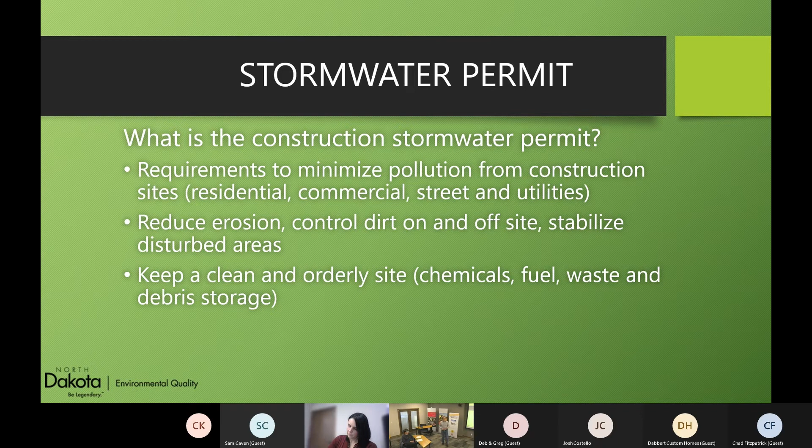Pretty much the permit is written to reduce erosion from a site. If there is any dirt, just to control that and keep it on site. If it does get off site, bring it back on site, and then just stabilize the area once the work is done. It also is essentially just keeping a clean and orderly site, so how do you manage your chemicals, your fuels, any of those type of things.

So the permit exists because it comes down from the Clean Water Act. The Clean Water Act, essentially this was back in the 70s, established a permitting process for what was considered a point source of pollution. Construction activity was eventually defined as a point source of pollution. It's one of those where, if it does rain and it starts washing material off the site, you could point to a construction site and say that is where the source of pollution is coming from. Does not include agricultural land. Agricultural land is exempt, that is considered a non-point source of pollution, and so therefore a permit is not required for them.

So the way it comes down then is in the federal rules, it says here is what we expect from a construction site. And then through that, EPA develops their permitting process and their permit that is used kind of as the national guidance for how others, or states, should develop their permits. And then in the state rules, we basically say we will incorporate the federal rules as written, not necessarily EPA's permit, but we incorporate the federal rules. And then we would look at EPA's permit and say, okay, here's basically the template, what is applicable to our state, what is not applicable to our state.

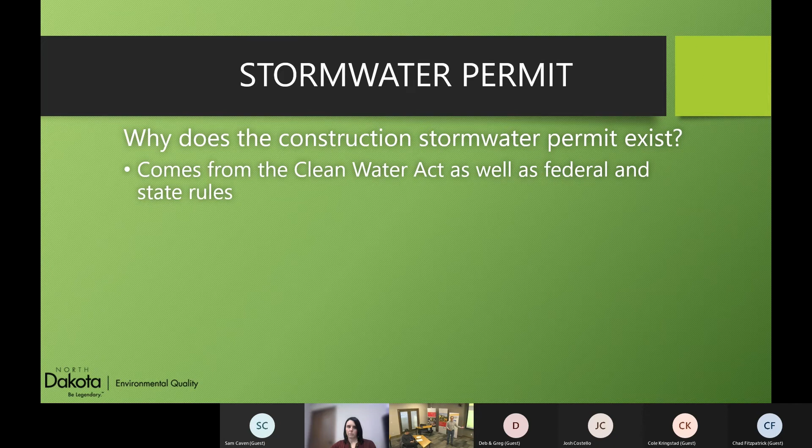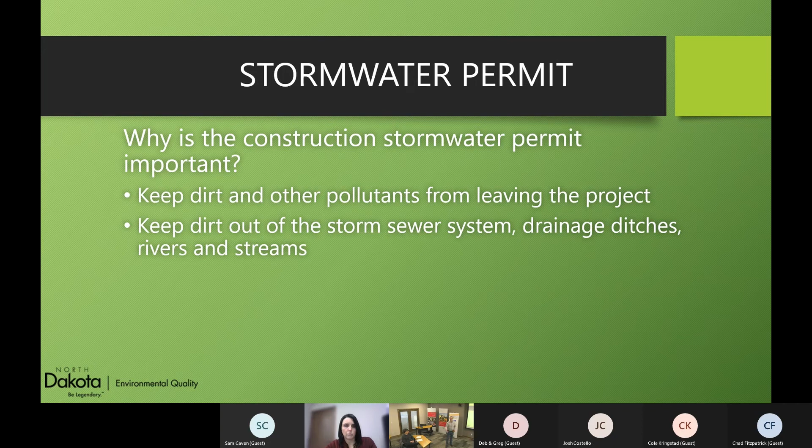Why is the permit important? Basically, keeping dirt and other pollutants from leaving the project. This is just to minimize pollution from your activity, keeping the dirt out of the storm sewer systems, drainage ditches, rivers and streams. Rivers and streams are important, but as far as infrastructure and flooding issues, you'll look at it as keeping that storm sewer system clean, keeping those drainage ditches clean.

I'll do a lot of talking on the North Dakota side, basically because that's what I am familiar with. There is obviously work on the other side of the river in Minnesota, so just keep in mind that that is a different agency, a different permit that you would operate under versus the state of North Dakota's permit.

There is involvement of the U.S. Environmental Protection Agency, but those are two different regions. The Red River basically splits - we're in Region 8 in North Dakota, based out of Denver, and I believe it's Region 5 on the Minnesota side, out of Chicago. So two different EPA regions.

But I'll talk about the North Dakota side, the North Dakota stormwater permit. There's also local jurisdictions involved with some of the activity you do. In urbanized areas, we have permits for, say, the city of West Fargo, city of Fargo, city of Horace - they have a permit with the Department of Environmental Quality, called their MS4 permit. Part of that MS4 permit says they have to develop an erosion and sediment control program for construction activities. So you start with the state involvement, and then you also have the local involvement, because they have a permit with the DEQ to say they're going to have that program. Again, that is just in the urbanized areas.

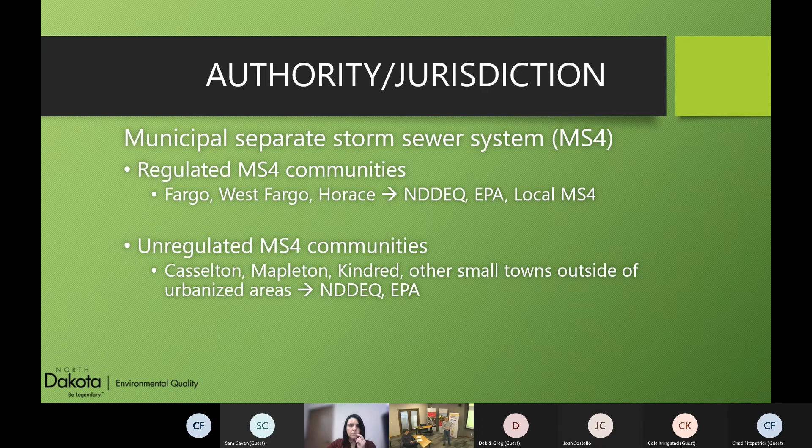Penalties - just going to touch on these. Under our state rules, we have the ability to issue a penalty up to $12,500 per violation per day. That's in our Century Code 61-28. Again, that's up to that $12,500. So when you talk about what goes into calculating a penalty, we don't have a flat fee for, say, not having a stormwater pollution prevention plan, for tracking mud out, for not having a silt fence or not doing maintenance on a silt fence.

Our fee is basically calculated based on severity of the violation and the damage of the violation. How significant is the pollutant coming off the site? Is it dirt versus some kind of toxic chemical? How quickly did you come back into compliance? Did you quickly recognize you weren't in compliance and correct your action, or did we have to order you back into compliance?

So that's why I say we don't have a flat fee out there. Ours is basically calculated on a scale. We also calculate whether you're a repeat violator, which is another metric that gets put into that penalty calculation that could potentially increase it.

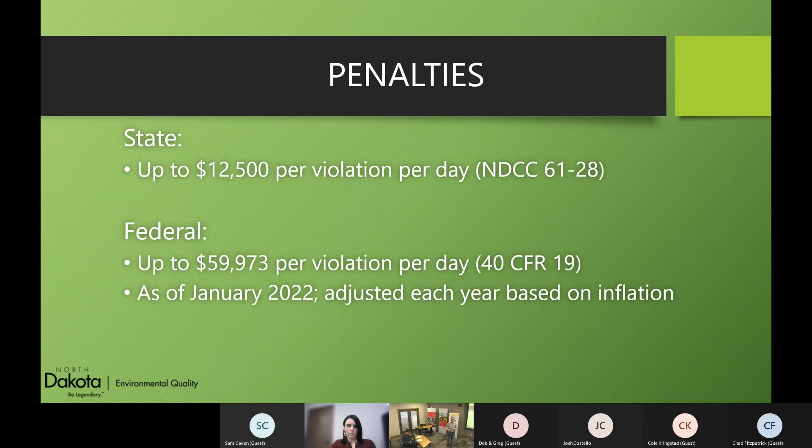So who does the permit affect? Pretty much anyone involved with a construction project—whether it's the builders, the people doing the excavating, those bringing in concrete or other building material, all the subcontractors, the developers, the cities, their contractors—pretty much anyone involved in a new area that's being built.

As far as projects that have to have a state stormwater permit, it's essentially any project that disturbs 1 or more acres. So if you think of a road project—say a county road project or a DOT project—if they disturb more than an acre, they're going to need one. A development in itself, if it disturbs more than an acre, has to have a permit. But it also includes anything that disturbs less than an acre that is part of a larger common plan of development that disturbed 1 or more acres.

That's where we get into the example of residential projects or small commercial projects. Even if that residential project is, say, 0.2 acres, if the overall development disturbed an acre or more, then that 0.2 acre lot essentially has to have a permit, has to have a pollution prevention plan, and is subject to the inspections and all that. That basically continues until the larger common plan of development no longer needs a permit. These permits can go on for years.

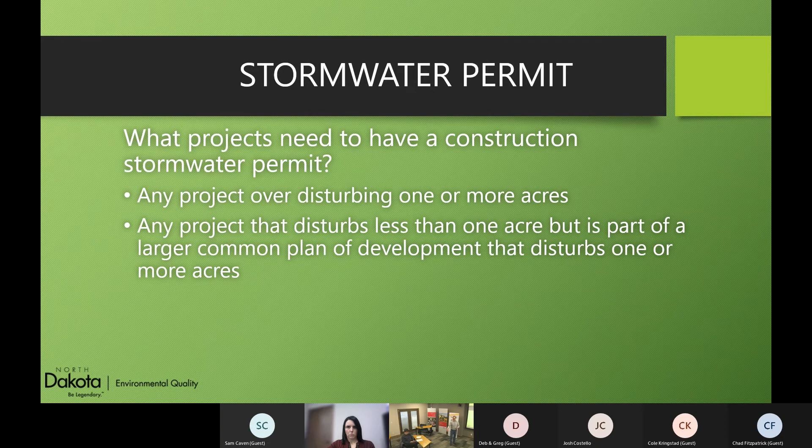Now, if it was a project in a new development that's less than an acre, then that would need a permit from the DEQ.

As far as site requirements for erosion and sediment controls, there's really no one set thing that we say you have to do on a project. If you look through the permit, it basically says use a combination of erosion and sediment controls, whatever you want to do, just minimize the dirt or pollution coming off your site.

When I first started, it was always use silt fence, put up silt fence everywhere. And then no one would ever take down the silt fence, or it would blow all over the place. Well, then we were finding other methods to make a site look better. It wasn't necessarily just having silt fence out there.

It could be a straw wattle put along the edge—there's some different maintenance issues than silt fence, but they could do that. Then you started seeing that the boulevard area or vegetation in the boulevard could act as a sediment control. So on a lot more projects, if there was a vegetated boulevard, they would not disturb it. Or if they did disturb it, they would try to save as much as they could, but then keep a straw wattle or silt fence in that area.

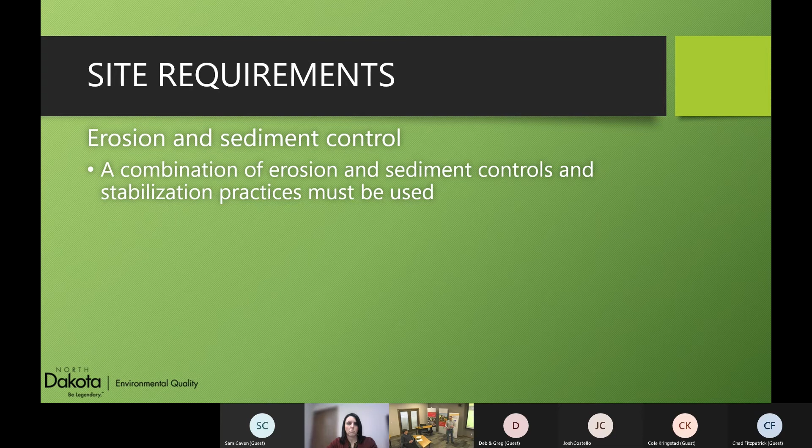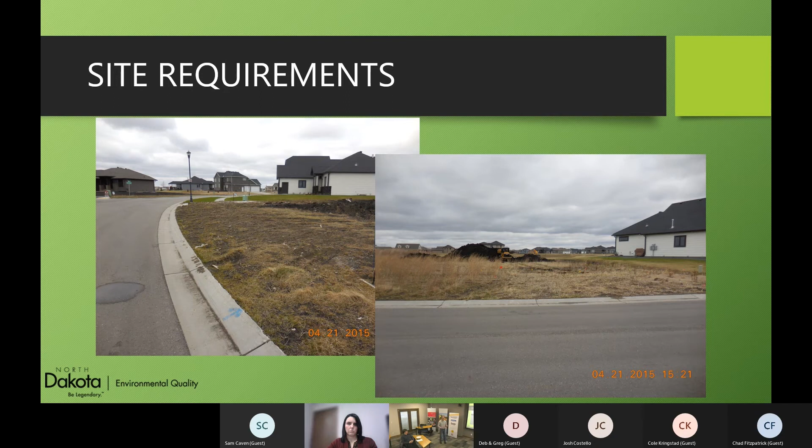Now on the right-hand side, they're starting to do work, starting excavation, but still maintaining the perimeter vegetation or perimeter controls. So overall, this would look like a site that meets the requirements of the DEQ's permit. We wouldn't have any issues with this.

Here's some more examples. One thing we run into is on the left-hand side, this is more of an example of people getting their final landscaping in, someone starting to put lawns in, things like that. One of the things with the DEQ's permit is that we do not regulate occupied residences. So if this becomes, say on the left-hand side, an occupied home, then the DEQ's authority is no longer involved.

Even if they don't have a lawn established, even if they have dirt that could run off the project, we have no involvement at that point. You probably have some involvement on the local level, as far as controls they would require, or establishing lawns in a certain timeline. But for the DEQ, we're done.

If this wasn't an occupied home, we would still have involvement even if landscaping was going on. So if the house is being built, and for some reason it goes beyond the timelines of stabilization or things like that, we would still expect a pollution prevention plan for that site.

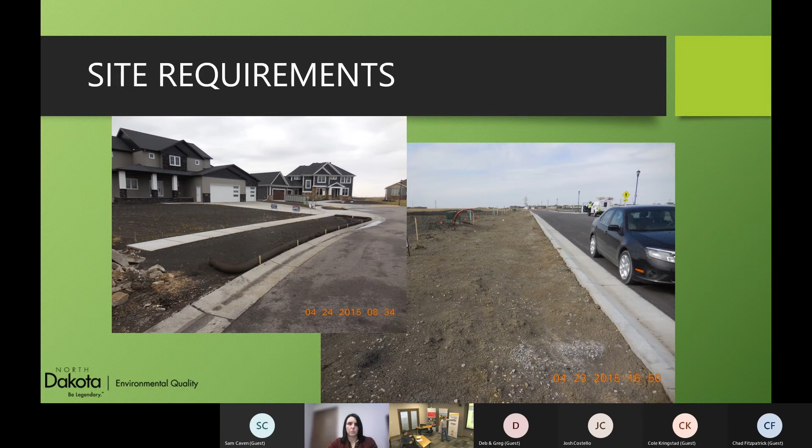Here's an example of erosion control blanket placed along the curb. That's another example of a BMP that can be used. Basically, what they're looking at is sediment control. If there's any runoff that comes through and runs off the lot, it would have to pass over the control and drop out any dirt, or the blanket would catch any dirt leaving the site, or minimize the amount of dirt leaving the site. I shouldn't say catch - we're just minimizing what's coming off the site.

So here are examples of dirt getting onto the street. This would be an instance where we'd have to have this cleaned up. If this were to occur, the permit says clean it up by the end of the workday, or a time frame specified by local authorities. So if the city has a quicker time frame for cleaning up the streets, then you would have to clean up streets in that time frame.

For this we get asked a lot - how clean is clean? And cities might have a different view of how clean is clean. For us, if you had to take a shovel to this, then that would be considered dirty. If you can see that there was a remnant of dirt in the street, but there isn't actually any dirt that you can't sweep up or pick up with a broom, then that would basically be a clean street. That's what we're talking about for removing dirt from the street.

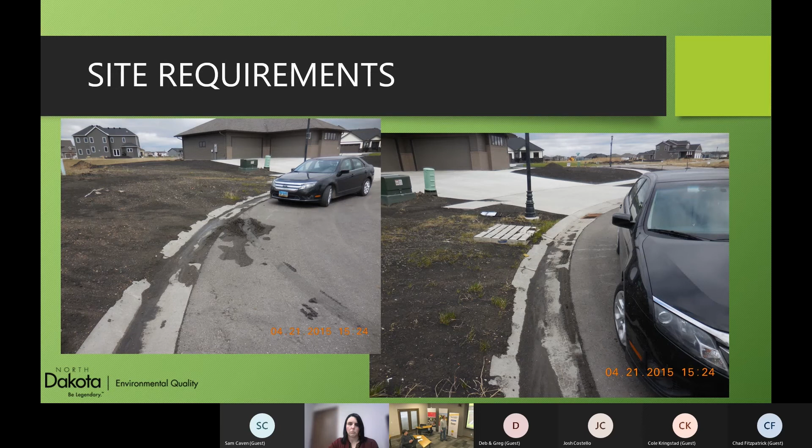Here's another example of a site with controls in place. There's inlet protection - probably would like to see more along the perimeter in this instance. But that's just some of the things we see. It's construction activity - there's going to be dirt coming off of the site. You're never going to not have dirt coming off a construction project, but it's just the way it is.

Here's another example or photo for this one. Here I would say they got the landscaping in, they got the straw wattle in place. Again, this would just need to come in at the end of the day and clean up the street. And it does depend on the time of day - when we look at these photos, the time of day that the DEQ shows up and looks at a site. Again, we give you till the end of the day. If we were to come back, say the next day, and see that there's still dirt on the street, then we'd be looking at - here's an issue. You're not following the requirements of the permit at that point.

And when we say the end of the day, it's the end of your work day - what is the end of your business day. It's not the end of, say, the DEQ's business day. So if you work late into the evening, say in the summertime, and you're cleaning up in the evening, then that is your work day or end of your business day.

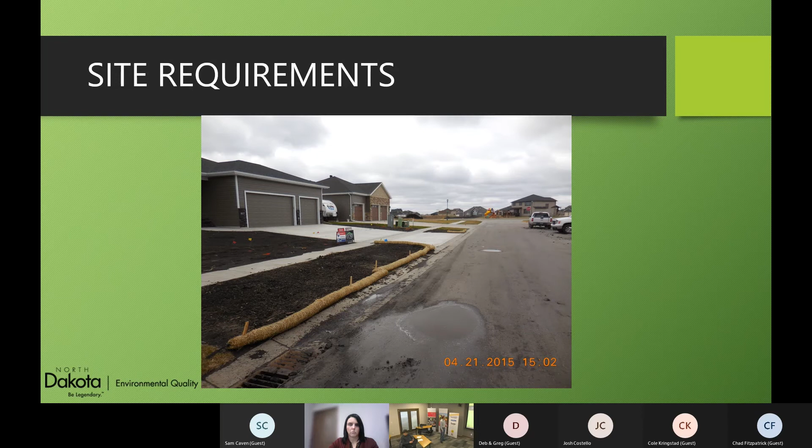Stabilization requirements: any project that has disturbance has to be stabilized. We have what's considered rapid stabilization requirements, which comes down from EPA's permit. Essentially, if you're going to permanently or temporarily cease construction on a site, you've got to stabilize it, and that stabilization has to be initiated immediately. A phone call initiates the stabilization, and it has to be completed within 14 days. If you temporarily cease, that's not 14 days from initiation, that's 14 days from temporarily or permanently ceasing construction activity.

When we get into residential construction and a home becomes occupied, do you have to establish a lawn for someone? Do you not have to? What happens in the winter? There are some nuances you can use to your advantage or follow to meet those requirements. I'll talk about it more later, but for residential construction it isn't just cut and dry, like 'do this and in 14 days do this,' because you could have time frames that this doesn't fall into.

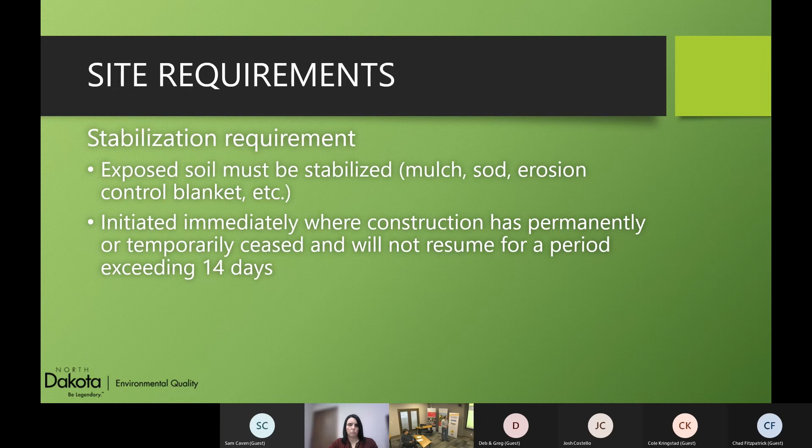Again, when we talk about stabilized, it doesn't necessarily have to be a finished lawn or anything like that. It could just be erosion control blankets put down, or straw mulch. You see that in some developments or road projects, where they'll come in and put down straw mulch or use some other method to make sure there isn't erosion from the site — that's considered stabilized. Grass seeding alone is not considered stabilized, so you have to employ some other methods to get stabilization.

Snow cover and frozen ground is not considered stabilized. There isn't a lot of snow out there, say here — there's a little more up north, but if you get out into the Bismarck area, we were already running into issues with runoff coming off of projects because our snow basically disappeared. This January or February, we got a half inch of rain that froze, and then we got 30 to 50 degree days that melted all that stuff.

We started having runoff issues right away this year. That's why we say snow cover and frozen ground is not considered stabilized, because if it snows on it and spring comes around, as that snow melts, eventually it's going to start eroding material off the site. If the site wasn't stabilized prior to winter, you're going to have sediment issues from that site.

Since frozen ground and snow cover is not considered stabilized, we still say you have to stabilize that site even if it is winter. We've had sites that had to do winter stabilization into December — I think one was close to Christmas time, where they had to go in and put down stabilization because they had to meet those requirements.

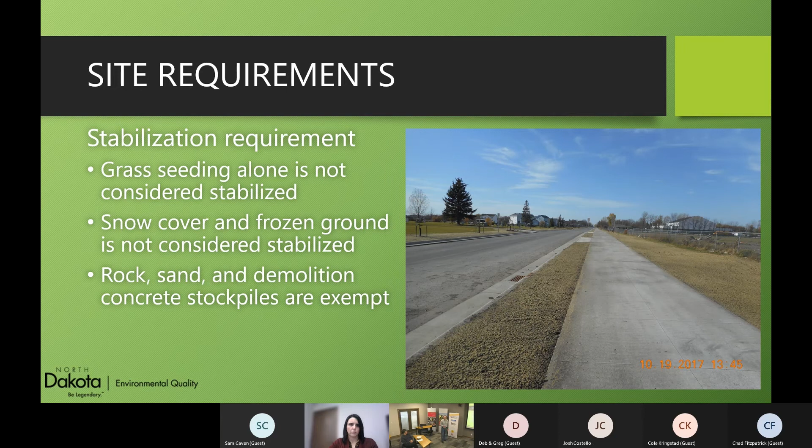But stockpiles do have to have effective sediment controls. It cannot be placed in curb and gutter or ditches.

I should explain one thing as far as what is a water of the state. By definition, for the DEQ, and this is in the state rules, the curb and gutter essentially is a water of the state. Now, when we operate as the DEQ under that rule, that is our definition. So if anyone's worked with the State Water Commission, they have a different definition of a water of the state. So it's two separate state rules. If you've heard of the discussion of waters of the U.S. and the back and forth with that, that is a different definition than a water of the state.

So as far as what we look at for the DEQ, we're protecting the water of the state. And when we look at what we have to keep, as far as dirt and those types of things, out of waters of the state, that's where we have to incorporate this to say do not put your dirt into the curb and gutter or even ditches, because that is a water of the state.

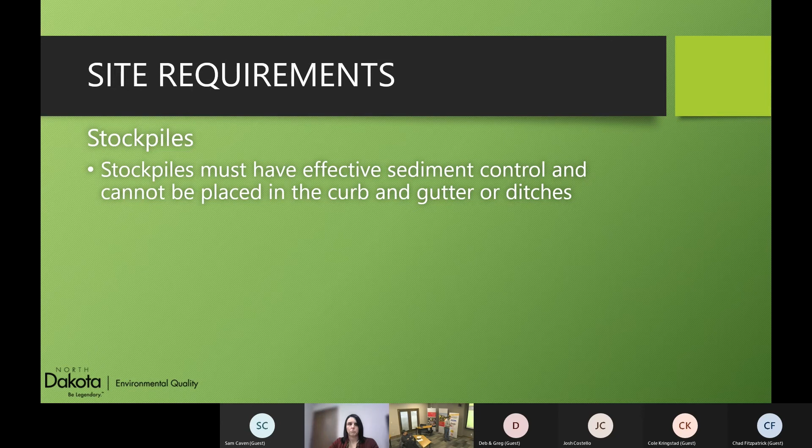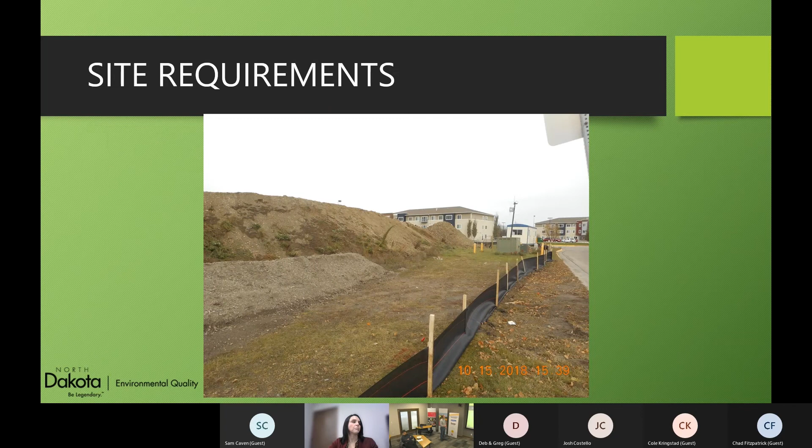Dallas, if you go back two slides, past that concrete structure there, is a vegetative buffer an adequate control for a stockpile?

Let's see, what's the requirement? Oops, went the wrong way. You have to have so many feet. Yes, so we do say for a vegetative buffer, you have to have 1 foot of vegetative buffer for every 5 feet of disturbance or disturbed area.

In this case, I would say, looking at that buffer, and again, there's probably more requirements out there that can ensure this is adequate, but you probably wouldn't need that straw wattle going into that vegetated area.

But with that said, the permit says you have to protect up to a 2-inch rain event. So if there is, you basically, that vegetative buffer, if it does rain, say like 2 inches on this site, and you do observe dirt coming off the site, even with this vegetative buffer in place and not having that straw wattle in place, then you would have to update your plan to then go, nope, our buffer wasn't adequate enough, we got to put in a straw wattle, if that makes sense.

So our permit is protective only so much. It's protected up to what we call the 2-year 24-hour storm event. And so the 2-year 24-hour storm event, going across the state, that's essentially, in this part of the state, a little more than 2 inches of rain in 24 hours. In Bismarck, it's right around that 2-inch in 24 hours. And the west part of the state is about 1.7 inches in 24 hours.

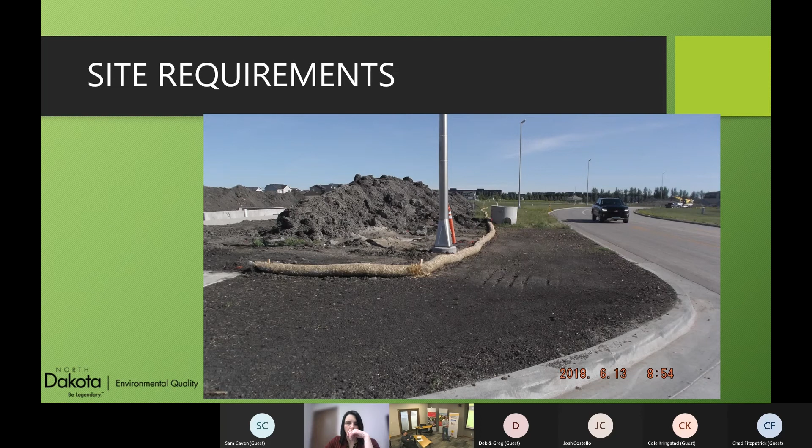Downspouts, pretty straightforward. You have to have splash pads and/or downspout extensions for roof drains. Getting into this example, the idea is we're controlling the erosion coming from the roof drains going across the properties. You've got to follow local regulations as far as placing anything across a sidewalk or on a boulevard, those types of things.

As far as putting a downspout, like a pipe, across the sidewalk, or discharging the downspout onto the paved area of the sidewalk, you still have to follow your local requirements as far as where that water can be placed. If there's an instance where another regulation prevents you from following a certain requirement of the permit, you have to document that in your SWPPP or pollution prevention plan.

As far as this instance, it kind of depends on the time of year too. If you're getting to a time of year where things can freeze and you have ice on the sidewalk, that's probably going to be an issue you'll have to watch out for. As far as putting the extensions or splash pads out here, we're just basically looking to minimize that erosion issue.

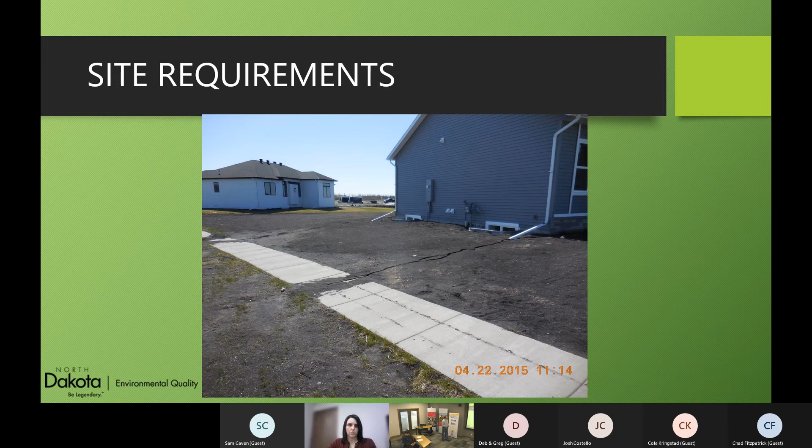Inlet protection. All inlets within the immediate vicinity of your construction site have to be protected. This includes any storm drain that can be affected by dirt tracked onto the street by vehicles and equipment. So you start to look at, do I have to use inlet protection? Am I required to? If I'm tracking dirt onto the street and it goes out for a block, do I have to protect the inlets that are a block away?

Those are things you've got to consider when looking at inlet protection. If you have a storm sewer inlet a block away, and you have controls in place to control track-outs or prevent mud from leaving your site, then you don't necessarily have to go protect that storm sewer inlet. But if you're going to have a project with a number of trucks coming out, say a big concrete pour with trucks moving all day and a chance of rain, then you may have to protect that storm sewer inlet. It may just be an issue of protecting it, but if you do put in the inlet protection, then you have to maintain it—those are always things you've got to watch out for.

We've seen it as far as track-out goes, in this area, after one of the floods, when it was time to take down temporary dikes. There was one project where the city had to protect about 3 or 4 blocks of inlets because they were removing dirt from those dikes, and they had to make sure no dirt got into the storm sewer inlets from that activity.

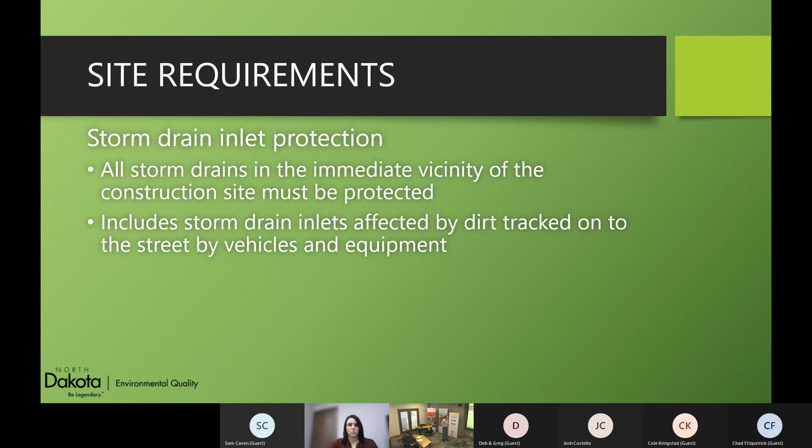They're a last line of control, you do have to have other erosion and sediment control practices on site. They do have to provide adequate drainage. We have seen a number of issues with inlet protection devices over the years. Probably getting a little better now that people are more familiar with the stuff that's out there and how to use it.

We were seeing, you get like a silt sack full of wet dirt, and all of a sudden you got to try and clean that out, let alone lift it. Those are the things we're starting to see. It's becoming more of a maintenance issue. And if it becomes more of a maintenance issue, then people are going to tend to not want to maintain it. So now we're running into issues where things are plugging up, or they're just being forgotten altogether. But that's where we go, okay, if there's so much concern with the inlet protection, go back to your sites, go back to the source of the dirt that got into the storm sewer inlet and control it from there.

They do need to provide adequate drainage. That's where we've ran into issues since the beginning, where they're not installed correctly, and so if there is any large rain event, the city will come out and have a tendency to open it up for you.

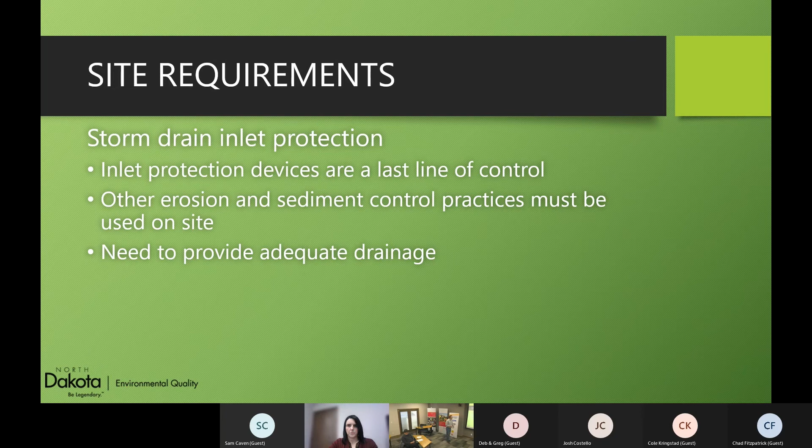Again, they can be removed if there is specific concern identified, and you have to document that concern in the SWPPP. So if the city says you have to remove it by a certain date, then in your plan, you have to write that out, that we have inlet protection in place, or if we're using inlet protection, it has to be removed by this date per this requirement.

We've seen it also where there was a project where a resident in the neighborhood did not like the inlet protection in place whatsoever because it caused flooding. Now, whether it was a significant amount of flooding or whatever, it ponded water. That individual went and started removing the inlet protection or opening it up pretty much every night. If you do have an instance like that, that's where you would have to go, okay, I can't rely on my inlet protection, but I do have to control any source of dirt coming off the site, so it's still protecting that inlet.

At that point, again, you have to document that something's happening to this inlet protection that's outside of your control, essentially, and that you've identified it. So if there is an issue, that person did it.

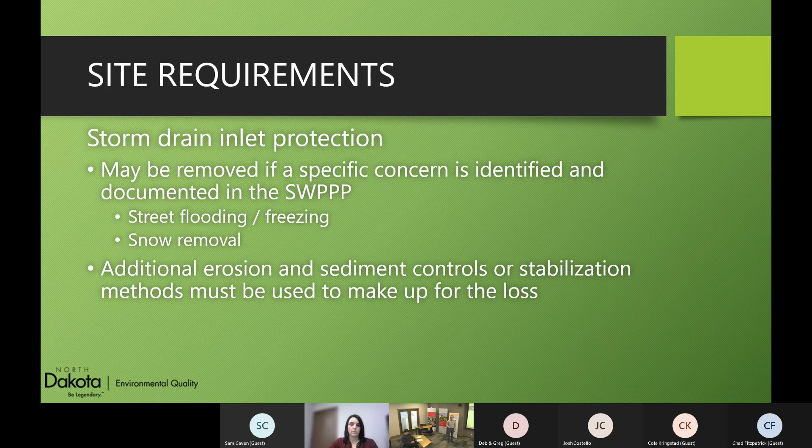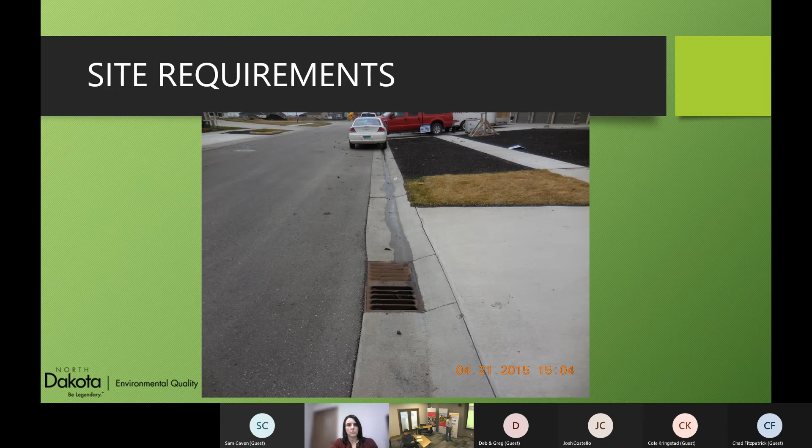Here's just a photo of an inlet next to a site. Nothing else much to say there—it is a lot of issues, but anyway.

So as far as inlets, here's one that should be protected. You want to make sure you're keeping the dirt out of the storm sewer inlet. Again, it's tough to tell, but there actually isn't anything in this inlet, so we want to keep that dirt out of the storm sewer system.

If you're piling stuff next to a site, here's an instance where this storm sewer inlet should have been protected from that activity. So that's another instance where inlet protection should have been used.

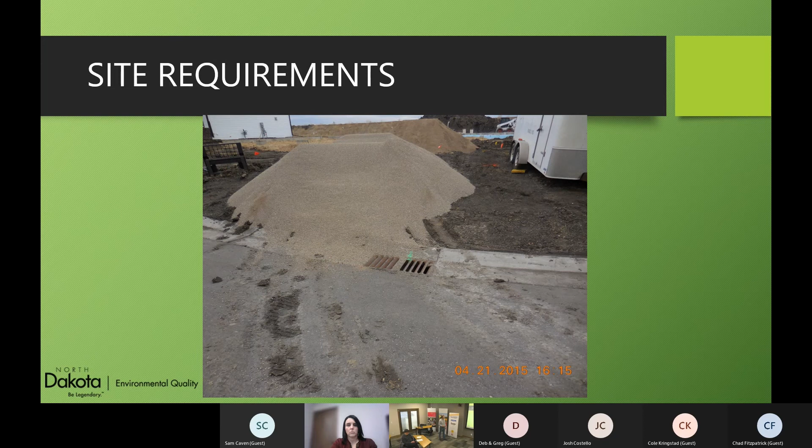When you get into backyard inlets, make sure if you do use controls back there that you don't have—or don't cause—a flooding issue in this area. The other thing is you don't want to put in something that could change the drainage pattern in this area. I'm not sure exactly if the city has any specific requirements for these types of inlet protections, but essentially we'd be looking at something that depends on what you want to do, as long as it adequately drains. Here may be an instance where, surrounding that storm sewer inlet, maybe you have more vegetation, maybe you have a blanket around it, maybe you put in a sediment trap around it just to catch a little bit of water and allow some sedimentation in that area. So the main thing is just make sure you're not affecting other property.

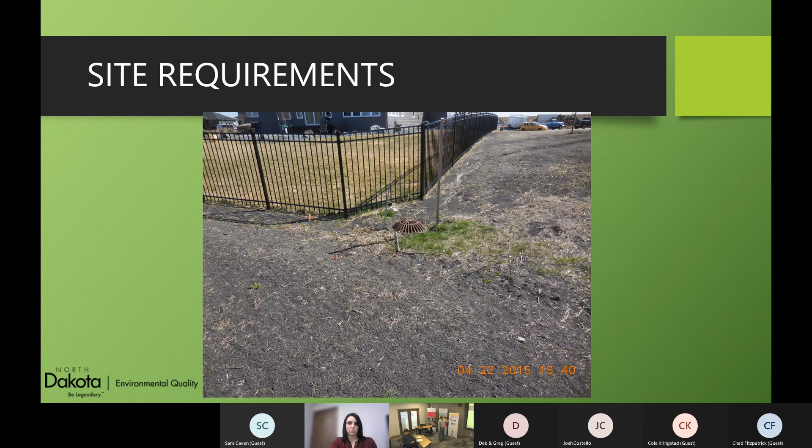As far as dirt getting into the storm sewer system, this is kind of what it looks like. These aren't big storm sewer pipes in this instance, but we can tell that dirt has gotten in there—it's gotten into the pipe, so there may have been a rain event that caused it to move.

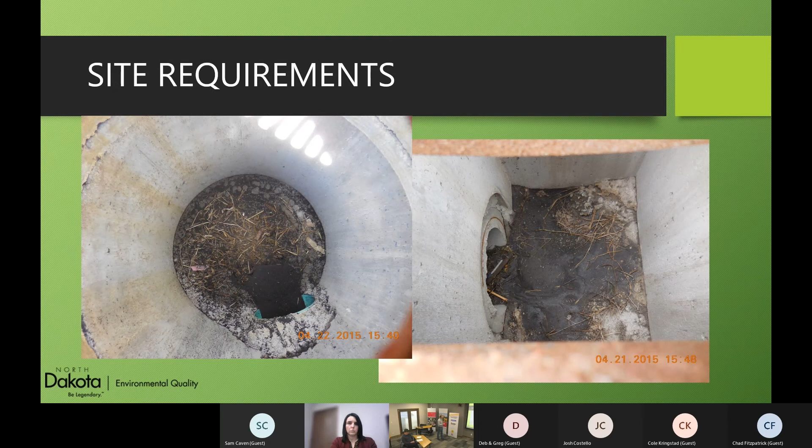What we're trying to prevent is something like this. This was an actual rain event where the inlet protection was not in place, and you can see the water—this is looking down into the inlet. You can see, on the left-hand picture and even on the right-hand picture, where sediment is, or where water is entering the storm sewer system. Now it's starting to wash whatever built up in the pipe or was on the surface into the storm sewer system. This gets pushed out into a local receiving water, and that becomes the source of pollution to the water of the state.

So we do look at these things, again being protective of those waters. We go beyond just the Red River or the Sheyenne River—we look at even legal drains, which can be places where aquatic life can basically propagate. We'd be looking at protecting that, or things like a creek that could be used for recreation, or an amenity that someone can look at and wouldn't appreciate dirt running through it. We're pretty much being protective of those.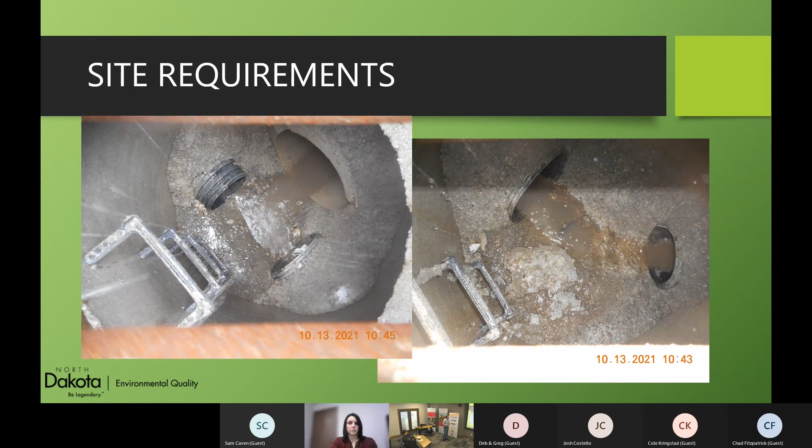Again, here's just an example of inlet protection devices on this site.

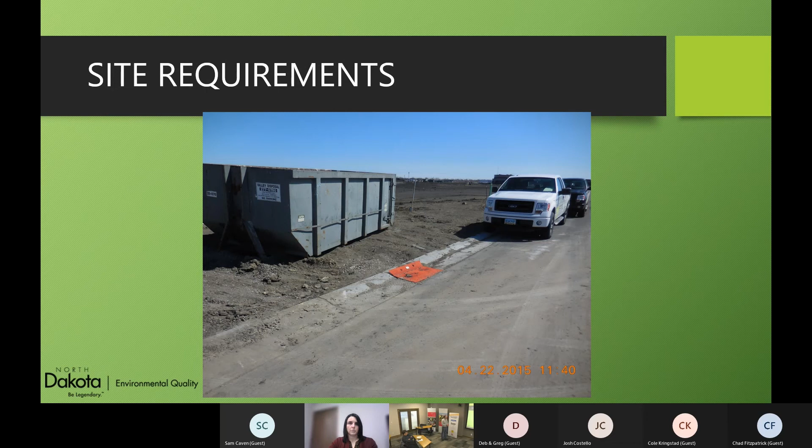Vegetative buffers, getting into what we talked about earlier. We have it in the permit as far as what we would consider an adequate vegetative buffer: essentially 1 foot width of buffer for every 5 feet of disturbed area that drains to the buffer.

We use residential building in the Red River Valley as the launching point for this, because we would see that if you had the boulevard in place and seeded, then if you did have runoff coming out of the project with dirt in it, it would stop in that boulevard area and not get into the street. So that's essentially what we're trying to write for this one.

Previous permits basically said you had to have a minimum width of 25 feet, which really restricted what we could consider a vegetative buffer. So we took out that minimum width and just said you can have 1 foot of buffer for every 5 feet of disturbed area.

When we talk about the vegetative buffer, we limit the slope of it. We'd like 5% slope or less, and the area that drains to the buffer to be 6% slope or less. Whether it's hard and fast, whether we're out there measuring it, probably not, but that's what we've considered in the permit.

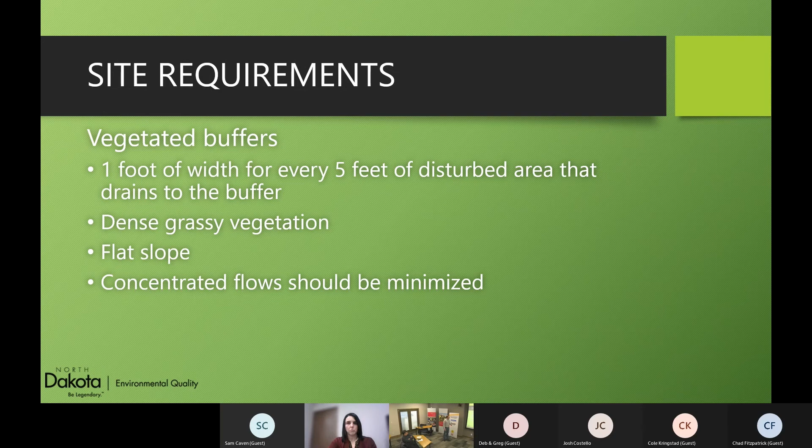Maintenance: erosion and sediment controls have to be maintained. So you can't just put it in and leave it alone — we do expect there's going to be some maintenance that occurs out there.

We always use as an example inspecting a site and looking at site inspection records and seeing that maintenance never occurred for a project that's been through a number of storm events and all sorts of wind and everything like that. It's like, well, how could you not have maintenance after that? So we do expect the controls to be maintained. It's not that we don't say it — if there is maintenance needed, we expect it to occur, and here's how you have to document that maintenance was done.

When we talk about maintenance, we say it has to be done right away — basically prior to the next anticipated rainfall, or within 24 hours of discovery.

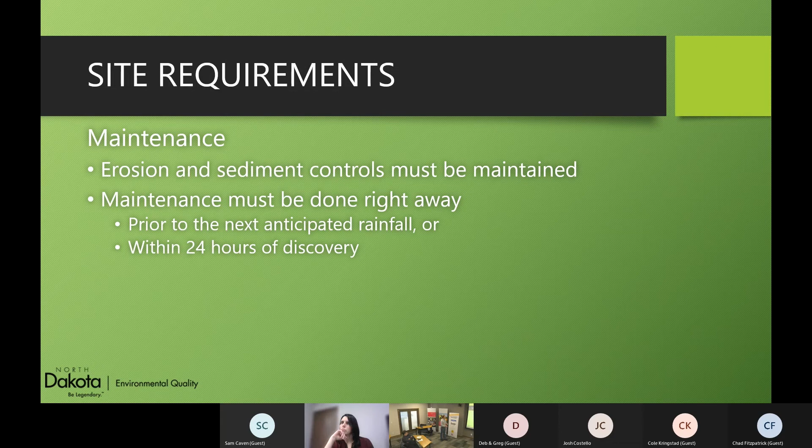The reason we have such a quick turnaround time is that we already expect the project should have the proper controls in place, so if there is a maintenance issue on site, it should be very small — something that can be corrected before it rains, or within 24 hours of discovery, or by the next day.

Silt fence and fiber rolls have to be cleaned out when they're half full. If the fiber roll loses half of its original height — because it flattens out by gravity or someone drives over it repeatedly — then it has to be replaced.

Inlet protection basically has to be cleaned out. When dirt builds up, they become clogged or do not work anymore.

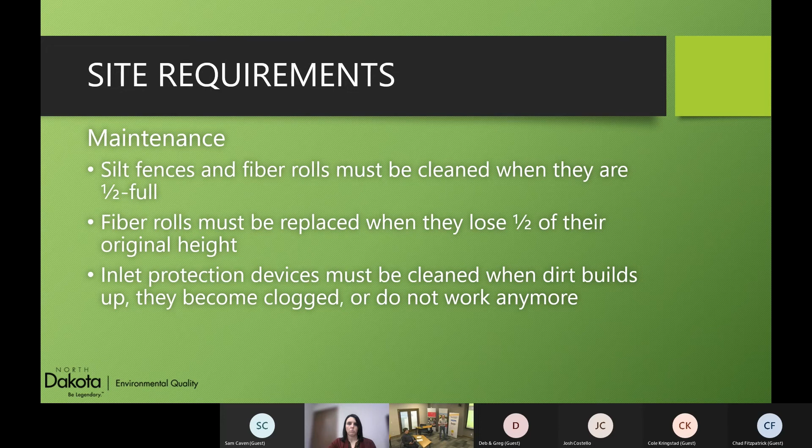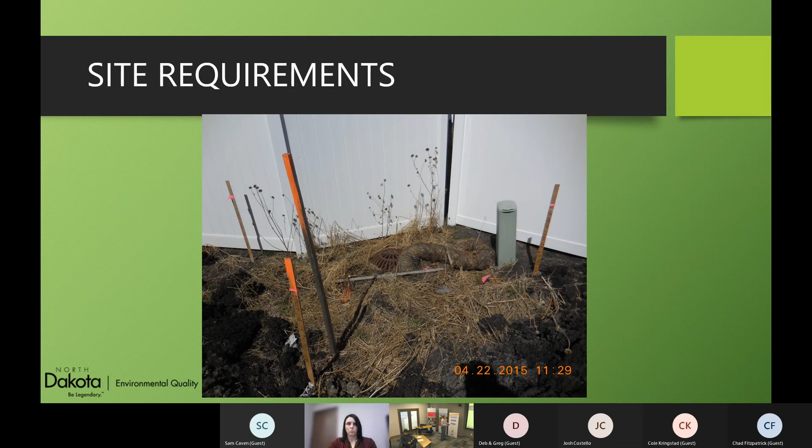So here's another inlet protection device. If you're being inspected, or doing the inspection, and asking whether this is in accordance with what the plan says it's supposed to be, you have to look and ask: is there a maintenance issue here? Should I remove this straw wattle if vegetation is supposed to be my inlet protection? Is the straw wattle supposed to be my inlet protection? Do I have to replace that? That's essentially what you're looking at.

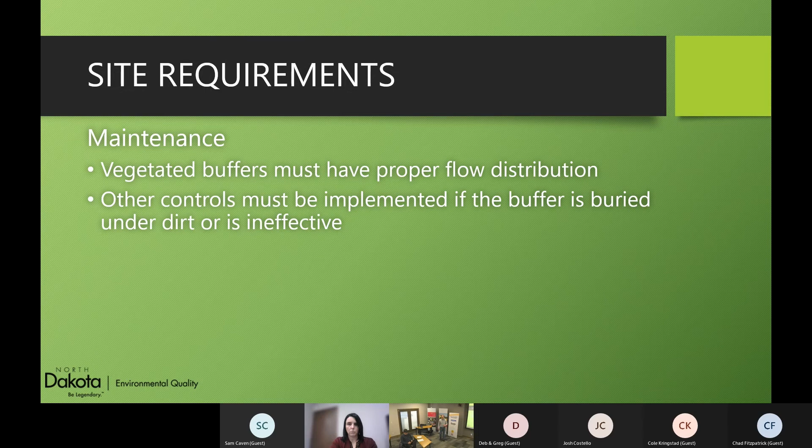Vegetative buffers - got to make sure there's proper flow distribution across them. If the buffer is not working like it's intended to, then you would have to look at putting in other controls, such as silt fence or a straw wattle, essentially.

Dirt, basically, or tracking out dirt, has to be minimized. Minimized could be as much as not letting people park on the site, or minimizing how many vehicles can go onto a site and come off of it. If it's something where you could have people park down in a designated area off the site, then go ahead and say that they have to do that.

You're probably not gonna - for years we always said well maybe you can stop the deliveries coming on that day and this and that. It's like, well, that's never gonna happen. You're gonna have deliveries, they're gonna come on, they're gonna track dirt off.

Well, if they're gonna track dirt off, then basically clean that up, or clean up what's being tracked off. Even if they show up when it's raining and stuff, at that point you kind of got to do the best you can. Not necessarily that you got to run out there in the rain and try and pick that up, but you do the best you can at that point.

We do say that if you do have dirt on the street, you have to remove it from the street at the end of the workday, or a shorter time period specified by local authorities. The permit also says if for some reason you cannot get in there - you have access constraints to get to a site to do any cleanup - then that is also allowable, but you also have to document in your plan what the access constraint was and why.

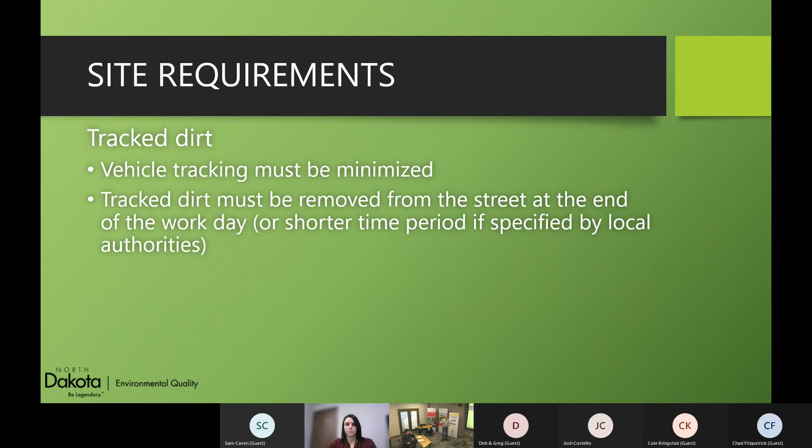So if you're planning this, it probably isn't going to be a long duration type thing that you're going to do. If it is something where you're going to use it for a long run, then you would have to look at putting something like a geotextile fabric underneath the gravel to basically prevent that rock from pushing into the dirt.

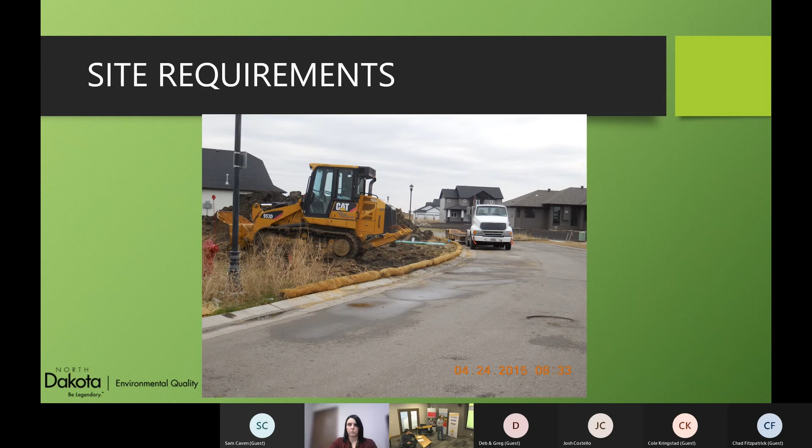As the DEQ or EPA, if we were to come on site and see this situation, and your plan says that this is not where people are supposed to be leaving the site, then we basically say you're in violation of your plan. You have an access that is not identified on the plan, or exit that's not identified on the plan.

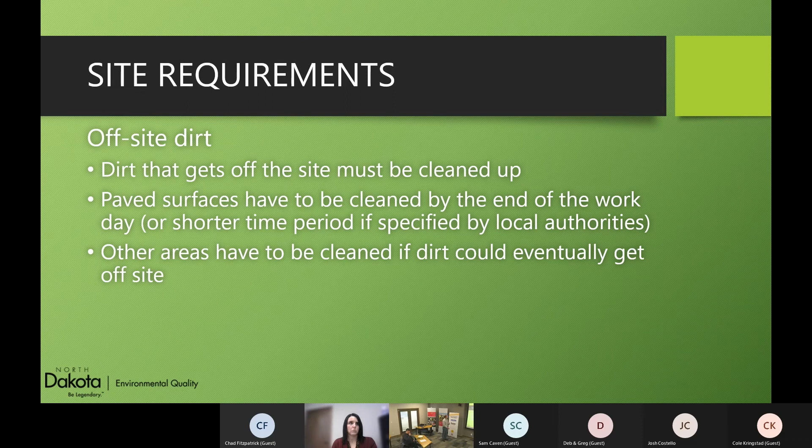As inspectors, we came across, say, a residential area, and you have a number of different parties working on a project or working in this area. So let's say you got one company on the left-hand side of the street, maybe 2 or 3 on the right-hand side, different stages of activity going on. We would essentially start at the end of the block and work our way down the street, or start somewhere and work our way down. We would try to get to every project that's here, or make contact with someone, or at least have some documentation of what is going on the street.

That way, we're putting everyone on equal footing at that point, that you're all going to get inspected. So if you have a project that is following the permit requirements and you have a neighbor who's not following the requirements, you could get inspected because the neighbor is not following the requirements. Just keep that in mind. Because we have heard it, is like, what about that guy? What about that guy? What about that guy? So in order for us to end that conversation, we're just going to inspect everyone, regardless of what their site looks like, and then just be done with it.

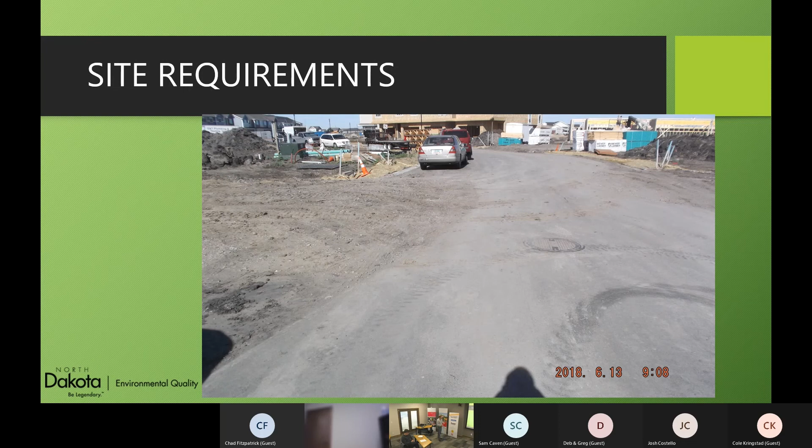Debris and waste, pretty much handle your debris and waste appropriately until disposal. Basically keep it stored on site, so if there is wind, it can't carry it away. We try to minimize how much stuff blows off a construction site. We see it a lot, especially if you get into developments that are on the edges of urbanization, where you don't have a lot of cover. That's where you're starting to see more of those wind issues, so that's where you really want to control your debris.

We do understand that things are going to blow off. You get 40, 50 mile an hour wind, something's going to let loose and blow away from the project, but we just try to minimize that. If you do have an instance where it blows off and you can go recover it, or identify that it's your stuff, then bring it back and take care of that.

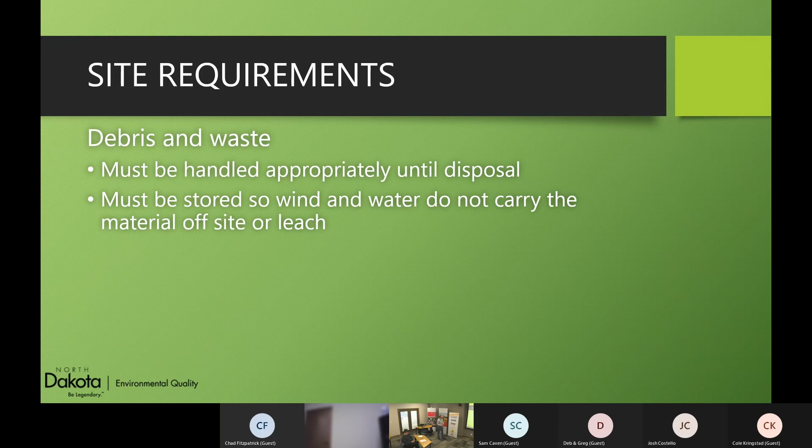Liquids and soluble material, so like your fuels, paints, other liquids, or anything else that can dissolve in water, that's got to be properly stored.

One of the changes, EPA recently reissued their permit. It's not really going to affect what you guys are doing until we start opening up our permit and looking to see if there's anything to change, but they did make some changes as far as storage of materials and how it's supposed to be stored.

Basically, if you have smaller containers, it essentially has to be sealed. If it tips over, it can't spill, same thing. But if you do get into larger structures, then you might be looking at secondary containment. That doesn't really change what anyone's really doing, it's probably more following what everyone's doing right now.

So that's one of the things that, when we're looking at properly storing materials, just make sure if you do have a bucket of something and it's raining and it continually rains and it's filling up that bucket and that material floats on top, eventually you're going to fill that bucket up enough that it's just going to flow over the top. So you want to make sure that bucket is either under something that rain doesn't get into, or if it were to overflow, you're managing that bucket so you don't have any issues with any pollution from it.

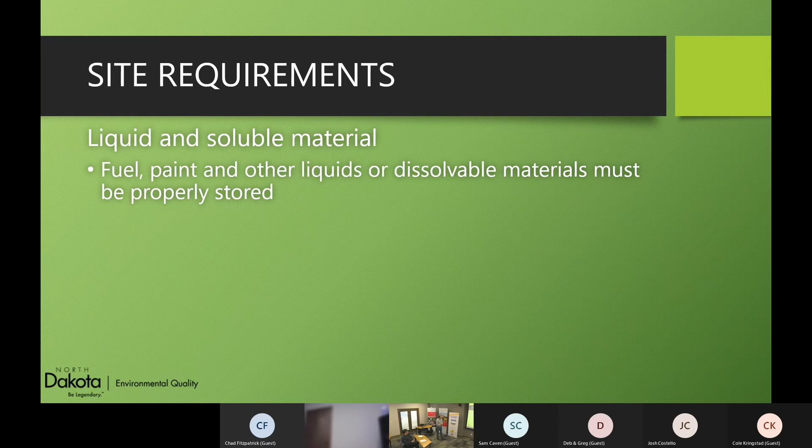Wash water. So this is always a big one. Concrete wash water, tool wash water, basically has to be controlled. Can't discharge from your site, can't go into the storm sewer system or anything like that. We say it has to be collected. If you're going to have it on site, it has to be collected in a leak-proof container or a leak-proof pit. If you do have a leak-proof container or pit, then it has to be cleaned out, both solids and liquids, when it's 80% full.

If you don't plan on having any concrete wash water on your project, be sure to include that in the pollution prevention plan, to basically say that this is going to be hauled off-site to a batch plant, or hauled away, so it's not our responsibility.

Basically you have an explanation that there is concrete here, there is going to be wash water generated, but it is not our responsibility. It's being taken somewhere else. That'd also be the same for any fuel that is being used, or any equipment that is on site.

If it needs to be fueled, is it being fueled by you? Are you using a fuel tank and nozzle on site? And do you have the appropriate pollution prevention measures in place? Or is it a vendor coming in that is going to fill it up?

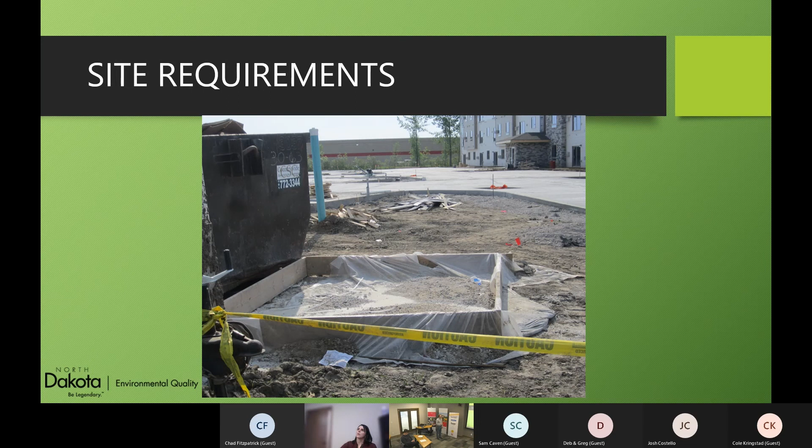Fueling: manage your fueling to minimize spills or leaks. We know there's going to be spills, but as far as leaks and things, if it's a nozzle, if you can store it so it doesn't drip outside of a secondary containment or outside of some kind of containment device, then that's what you'd be looking for.

Any material, if there is a spill or any leak or anything like that, that's got to be properly disposed of. In the pollution prevention plan, we do have to talk about the type of material that you have on your site, as well as spill prevention and response procedures for it.

If you do have a large enough project where you have a spill prevention control and countermeasure plan, then you can use that as your spill prevention and response procedures in your SWPPP for your petroleum products.

Other chemicals, there's different ways you can look at or follow that. One is, and this is for anything that you're using, you can refer to the safety data sheet for that product. That safety data sheet should say that if you do have a spill, here's how you're supposed to clean it up, here's the proper procedure for cleaning up, here's how you're supposed to dispose of it.

The other thing is you just refer to the label as far as cleanup and stuff, so if the label says here's how you're supposed to properly clean up and dispose of this, then just refer to that label.

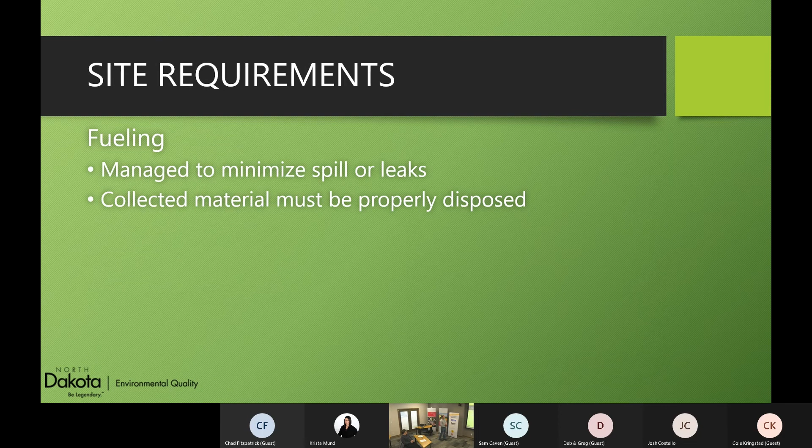Paperwork. So that's basically the overall site requirements and what we see as far as the work that is being done on the different sites in the area, as far as the type of activity that you're involved with.

This will be more of the, okay, how do you apply for a permit? What is the paperwork that's involved with the permit? How long do I keep those records, and what type of records can I have?

So with this last general permit, when we issued it, I should give a little background on the general permit. The general permit we issue every 5 years. So this one, the requirements of it were issued in 2020, April of 2020.

So those requirements will basically be in place until March of 2025. And when it comes close to, before that permit expires in March of 2025, we at the DEQ have to go out and see if there have been any changes in federal rules, or if there's anything in this permit that just didn't work, or something we need to incorporate from EPA's general permit that is applicable to the state.

And then with that, we would write up the permit. We would write up a statement of basis, which basically explains why we wrote the permit the way we did. And then we put that out for public comments. That's about a 30-day public comment period.

Essentially, anyone can comment, look at this permit and say this is appropriate, or this does not work, or whatever, and send comments into us about the permit. Any comments we receive, we would then address, and then we would issue the final permit. So that's how it's supposed to work.

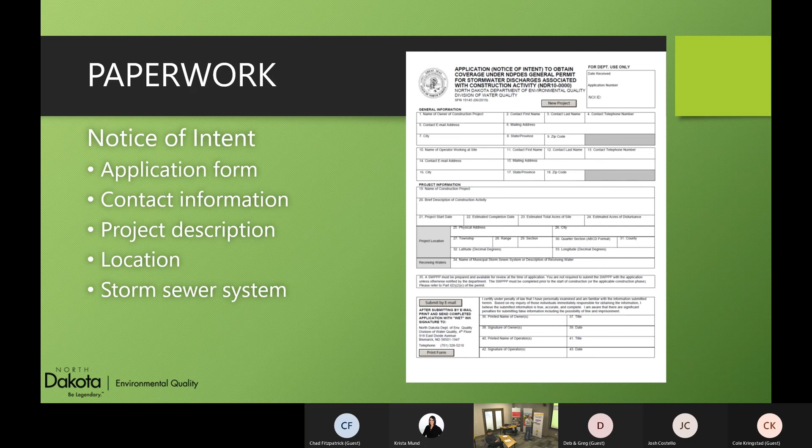And then you sign it—well, there are a couple other steps, but that's basically the information we're looking for on the form. You don't have to send in your pollution prevention plan to the DEQ or anything like that. Essentially, assuring compliance with the permit, that your SWPPP is following the permit, happens when we inspect your site. So we just want the application and to know where you're located.

We do have two methods of getting the NOI information to us. For the most part, contractors will use what's known as the hybrid method of submitting the notice of intent. Basically, you're emailing the information that's on this form to the DEQ, not the form itself. Then you have to print off the form, sign it, get a wet signature on it, and mail that in to us. It's a requirement under federal rules as far as how that has to be done, so that's essentially why we have to follow this method.

So what happens is, in the upper right-hand corner of that form, there's a 'new project' button. You press that, and next to it there's an NOI ID number that gives you a unique number—it's kind of like a timestamp for this form. Then you fill it out and hit the button that says 'submit by email.' That pops up an email that attaches not the form itself, but the information from the form. So it doesn't attach a PDF document to the email; it attaches what's called an XML document. If you open up the XML document, it basically looks like a bunch of coding that gets submitted to us.

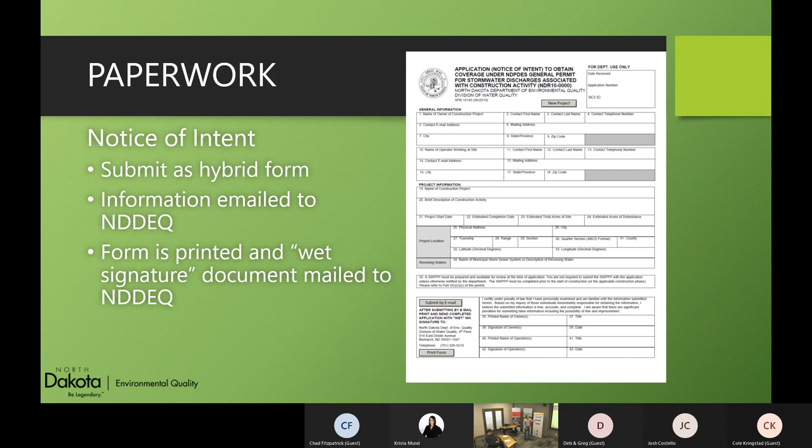So, stormwater pollution prevention plan, or SWPPP. It's essentially a pollution prevention plan for your project. If you have a SWPPP or multiple SWPPPs for a project area, they basically have to be implemented from cradle to grave. So from when you start opening up the dirt or disturbing the area until you have final stabilization, there should be a stormwater pollution prevention plan in place.

In this instance, when we talk about final stabilization, that could be an occupied home where someone else, or the resident, is going to be doing the stabilization requirements, putting in lawn or whatever, or vegetation is established on your end.

When we talk about final stabilization, essentially in North Dakota you have a couple options. You either have to meet 70% of pre-existing vegetative cover, and that gets kind of tough when the pre-existing cover was like a bean field or something. Then you have to look at, if someone is going to establish lawns or have decent growth, what does that look like for 70% cover? You have to have that before you'd be considered final stabilization to submit a notice of termination.

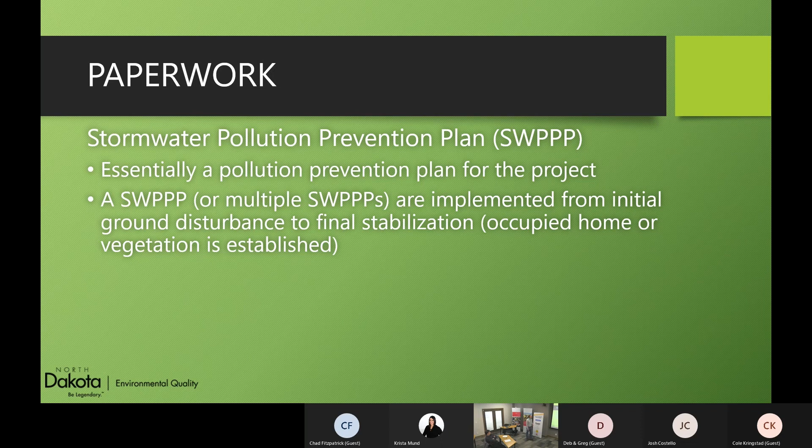So the purpose of the SWPPP basically explains who has control of a site and the responsibilities of the site as far as pollution prevention and how that plan gets communicated to others. The plan will say here's what our erosion and sediment controls are going to be, here's our good housekeeping, here's who's responsible over here, here's who's responsible for this, here's who's doing this for my project. It might be yourself, your company, or subcontractors, or you say this party is responsible for it. Basically it explains who's doing what.

You could have multiple SWPPPs working in one area. Say if you have a project working next to another active project, both projects can basically interact with each other. They just have to work together as far as what's going on there, ideally.

So basically, what is your pollution prevention plan for the project? You have to have a site map for the project, basically showing where your erosion sediment controls are going to go, where you're going to store materials, and where you're not going to store materials.

One of the things we changed, for those who've been inspected in the past, we always talked about showing where the porta potty or dumpster is on your project. If the porta potty moved and it wasn't in the same spot as on your plan, you always got dinged for it. Same thing with the dumpster. If it wasn't in the same spot where you said it was supposed to be, you got dinged. Well, we updated the permit in 2020 to say you can either show where it's supposed to be or show where it's not supposed to be.

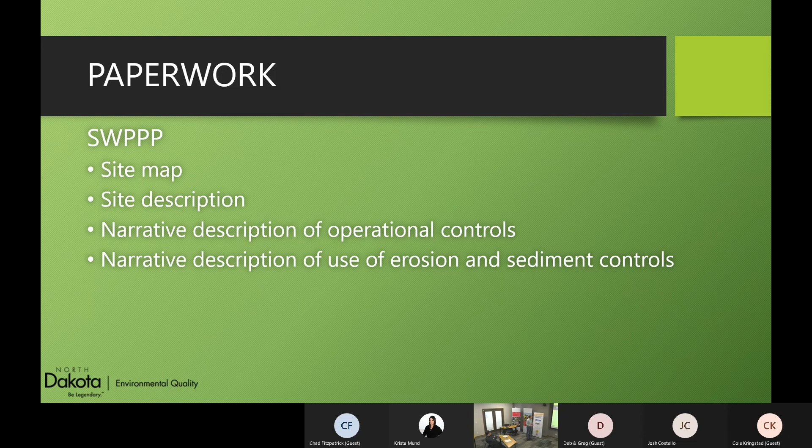Anyway, back to the SWPPP. We also talked about identifying who is responsible for the SWPPP. This could be, we see a lot of it where it's kind of by title, not necessarily that individual is responsible, but this person in general is responsible for it.

Chain of responsibility, basically from the top on down. Especially say like a city project, the city would be the overall responsible party for the project. The operator is responsible for the things that are delegated to that operator. If you have a city and their consultants, then the consultant is somehow incorporated into that chain of responsibility, acting as the agent of the owner type thing.

Getting into residential construction, basically if you're like the home builder, then you are pretty much acting as the agent for that lot owner. So you're kind of the one responsible for what's going on, or responsible for this plan.

Good housekeeping - we basically have to talk about how you're going to keep a clean site, how you're going to manage your litter and debris and chemicals, and if there's any tracking, how that's going to be done, dust control, those type of things.

We do talk about equipment maintenance being one of the things you have to discuss. For the most part, if you're not going to have equipment maintained on site, then just say it's not going to be maintained on site. If you do have equipment that is maintained on site, then just basically say, yes, we could have this on site, and we're going to take care of that.

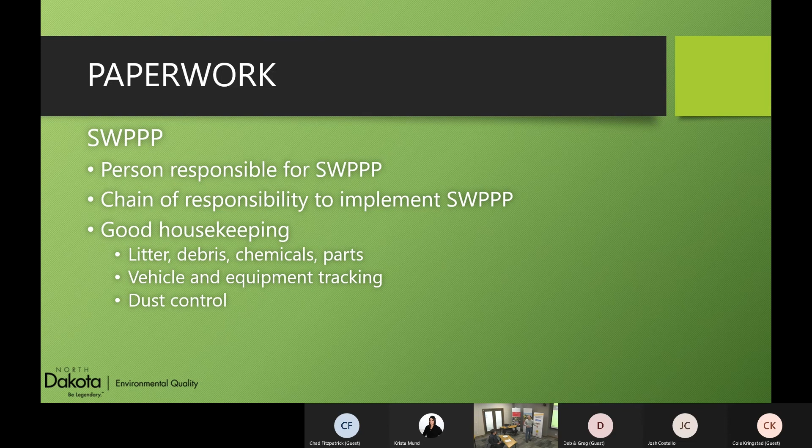Again, talk about your spill prevention response procedures. Employee training - employees have to be trained. It's pretty much project specific. They've got to be trained annually, as well as new employees as they are hired.

basically to ensure that the SWPPP is being implemented. So if there's someone coming onto the site, or there's someone new, you basically have to explain, here's our SWPPP, here's what the purpose of the SWPPP is for, and here's our controls. Here's how we do our things. Here's how we manage, if there's a spill, this is what you do. Keep a clean and orderly site, that type of thing.

If you're coming onto a site and they're not keeping the site clean, if it's something where you could have a tailgate meeting to say we need to keep the site clean, that is considered training for the intent of this. But anyway, you've got to do an annual training too. As people rotate around, it's pretty much like, yep, we got to do the training again.

Just talk about how you're going to manage your concrete washout and tool cleaning. If there are any dewatering activities on the site, how do you manage that?

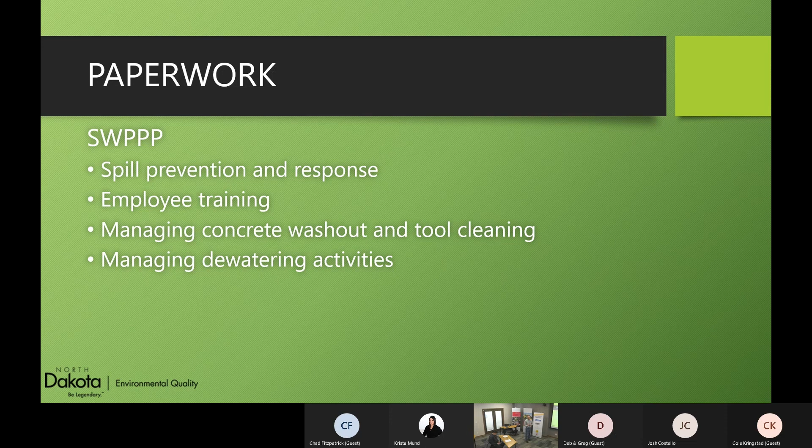As far as your erosion and sediment controls, you basically have to talk about that in your SWPPP. If you are using them, talk about sediment basins, silt fences, fiber rolls, buffers, those type of things. They all have to be along the downslope boundaries, basically managing that runoff as it leaves the site.

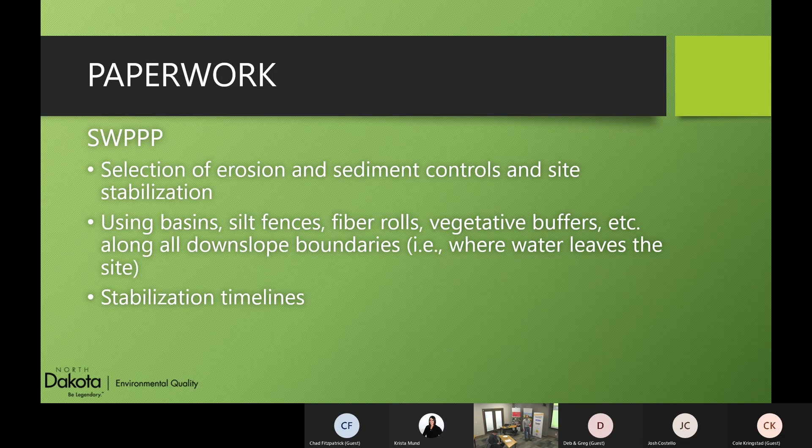Talk about your stabilization timelines. How are you going to stabilize the site if you need to? Those type of things.

Also talk about your selection, installation, and maintenance of erosion and sediment controls. If you install it, how are you going to maintain it? Installation and selection are pretty much industry standard. If you have an installation guide, just incorporate that as part of your SWPPP. So how does the silt fence get installed correctly? How does the straw wattle get installed correctly? That's what we're looking for as far as the installation guide.

Maintenance, we do call it out in the permit that anything similar to silt fence or fiber roll has to be cleaned out when it's half full. So there's your maintenance requirement there.

We also talk about inlet protection. If you have something more specific as far as cleaning out the inlet protection, then you want to call that out in the plan.

Some of the things there too, you kind of got to watch out for when you're writing the plan. You want to avoid saying that we're going to clean things out as needed, because your as needed is different than my as needed. But you also want to watch out for saying that we're going to clean out something at like 50%. It'd probably be better to say we're going to clean out something as it approaches 50%, so that way it's somewhere in this range, not quite 50% yet, but somewhere in this range we're going to clean this out. So there's kind of an art to the way these are written sometimes.

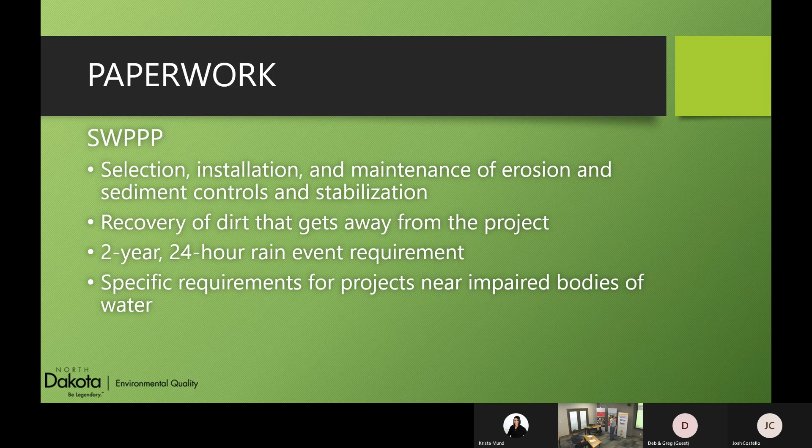Post-construction pollution control - if this is when they're going to be used, you also have to talk about them. This would be more for the MS4 communities; one of their requirements with us is that if there is any new development or redevelopment, they're supposed to have a long-term pollution control for stormwater runoff incorporated into those projects. So if you run into something, or even like a stormwater pond that's incorporated in your project for, say, an individual lot, those all get talked about in your plan, or just included in the plan.

Again, maintenance of different things on site, inspection of the site - so basically, what's your inspection frequency? The permit says at a minimum you have to inspect the site at least once every 14 days, and after each quarter-inch rain event. So you'd want to put that into your SWPPP.

The one thing is that if you do get a quarter-inch rain event, that does not reset that 14-day clock. That 14 days is every 2 weeks there has to be an inspection. Even if it rains the day before that inspection or on that inspection, you still have to do that inspection.

The SWPPP has got to be signed. We basically say it needs to be signed by a responsible corporate officer type, or a duly authorized representative. And if it is someone who is duly authorized to sign documents for the company, then that authorization needs to be kept in the SWPPP plan.

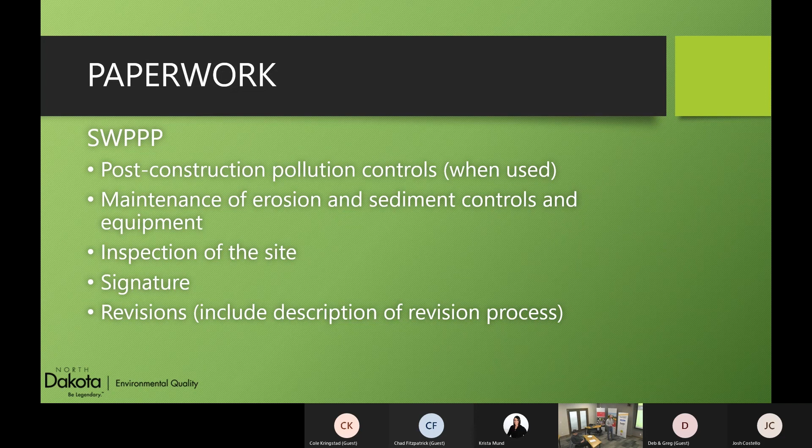Again, just to gloss over the inspection records here: once every 14 days after a 1/4 inch rain event or larger. Dewatering, if you're doing any dewatering, that has to be inspected daily.

As far as records, you have to record your inspections. You'll hear it a lot: if you didn't record it, it didn't occur. So you always want to record your inspections to make sure you can document that it's been done.

We only expect inspections during normal business hours. So say if you don't normally work on weekends and it rains on a Friday, and the permit says inspect within 24 hours, you're not required to come in that Saturday and do an inspection. You can wait until Monday. We only expect it during normal business hours.

Same thing with holidays. If you don't normally work on a holiday, you're not expected to do an inspection on a holiday. If you do work on weekends, or normally work on holidays, then there should be an inspection record.

We are allowing more for electronic records for the inspections. But what you have to include is basically the date, who did the inspection, findings, corrective actions, or if you're still waiting to conduct corrective actions, you have to document that too, along with a signature or means to verify the inspector.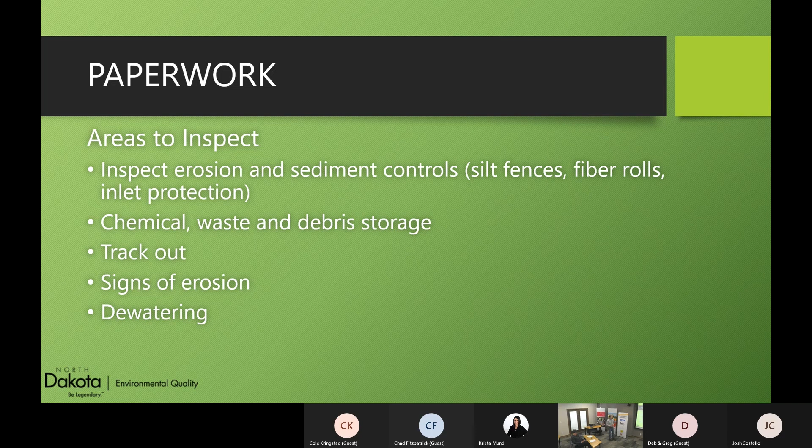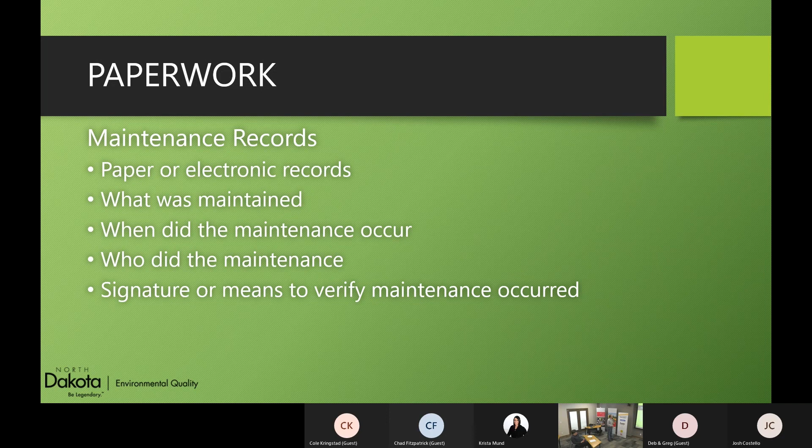Transfers and modifications: as far as working under the permits, when we're transferring responsibility from one permitted entity to another, or from one responsible party to another, we pretty much handle it with a transfer modification form for us. As far as transferring from a developer to a builder, or a builder or developer to a lot owner, you don't have to fill out a transfer form for that.

We've basically said that the closing documents on that property are the transfer form. That way we don't get inundated with transfer forms or forms coming into us for things we don't necessarily need. We can basically say this responsible party is responsible over here based on these closing documents.

You don't have to send the closing documents to us either. We're just basically saying that something is happening, and we'll figure it out later. If it goes to a developer or builder, and that builder doesn't have a notice of intent for that development or lot, then the new builder would have to submit a new notice of intent to us to get coverage.

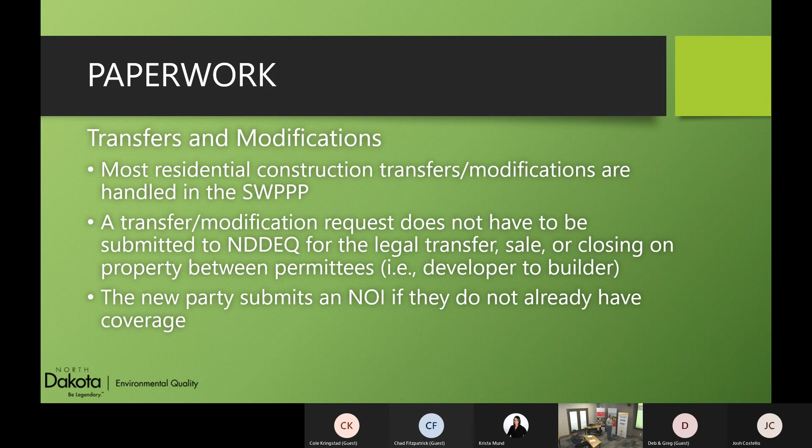Termination for residential construction is a little different. For any other project, it's pretty straightforward. Once you get that notice or the project is done and you meet the termination requirements, you can submit the notice of termination, which ends that permit.

When you get into residential development or construction, because we're permitting a large area, we're basically saying that when you're done working in that area is when we want the notice of termination. Or if you've stabilized all the lots to meet final stabilization, then you can terminate the development permit. That's not to say there aren't other permits still needed in that area, but you're basically ending that responsibility.

As lots are sold or transferred one by one and meet final stabilization, those changes can be handled in the SWPPP. You just update it to say, yep, we've got this in place, this is who's handling this. Then, once you've achieved final stabilization, the notice of termination can be submitted to us.

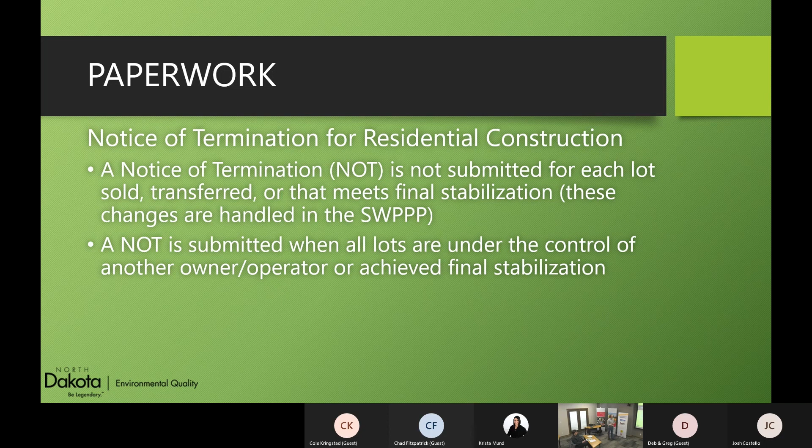Records retention: keep all your records for at least three years after coverage expires or is terminated. Keep a copy of the NOI, SWPPP, inspection and maintenance records, and document your transfers, notice of termination, etc. Anything really related to this permit's requirements should be kept on record for at least three years.

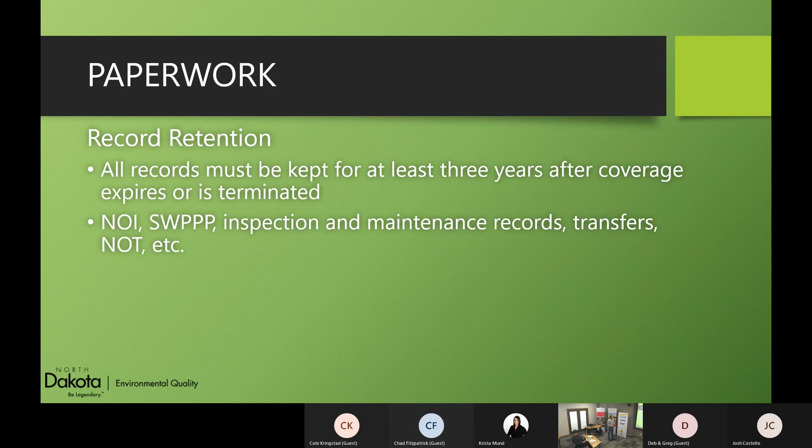So, end of permit coverage. Conditions to end it: basically, you've transferred a house to a homeowner, so you're not required to plant a lawn at that point, but it may be left to them to establish one. That would be considered a way to end the permit, or end your permit coverage for that lot.

The other option would be to establish the lawn yourself. Then, once that lot reaches final stabilization, you can end your responsibility for it under the stormwater permitting aspect.

If a project is completed in winter, it's still required to stabilize the site, using straw mulch, hydro mulch, or similar. The SWPPP should have accounted for this, but if winter weather prevents you from stabilizing the site, you have to put together a stabilization plan saying here's how we're going to stabilize the site even through the winter, and when we get the opportunity, we'll do it.

If you're in a situation where you have 14 days to stabilize it, but it suddenly gets transferred to or becomes an occupied residence, that basically ends your requirements. You don't have to do anything more with the plan, but you still have to move forward with it just in case there's a delay, so you have a plan in place even if someone took it away from you. Those things tend to occur in winter, so just watch out for that.

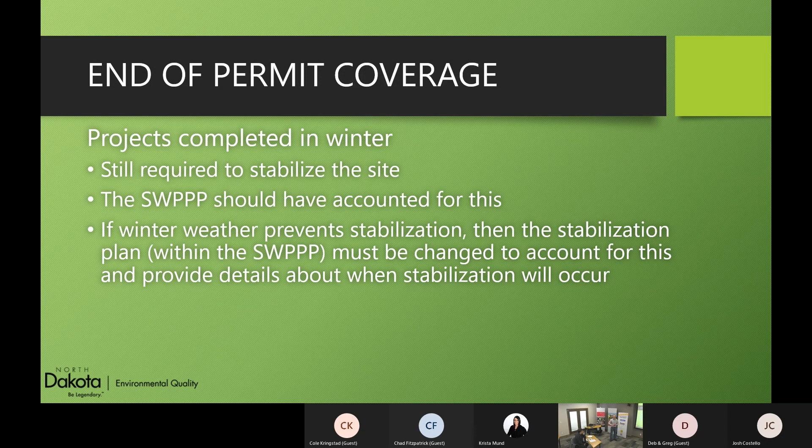That's where a lot of documentation is going to start occurring at that point.

So that's basically the paperwork stuff that's out there. Just kind of the common violations that we see is essentially four of them, where we break them down into four categories. One is not having a notice of intent, or not submitting a permit application or getting a permit from the DEQ. So that's pretty straightforward.

This is not the same as a city permit. So if the city has their own erosion and sediment control permit that's out there, this is not the same. It is a dual permitting process. We've known it's a dual permitting process for a long time. It doesn't seem like it's going to end anytime soon. So just be aware that you have to submit a notice of intent to the DEQ.

The other common violation we see is just no SWPPP. So if you've submitted a notice of intent for your project, or even if you haven't, if you know you're supposed to have a pollution prevention plan for that project, then you need to basically have that. If you have submitted a notice of intent, one of the requirements of the permit is to have the SWPPP. So if a notice of intent is submitted, there better be a SWPPP somewhere.

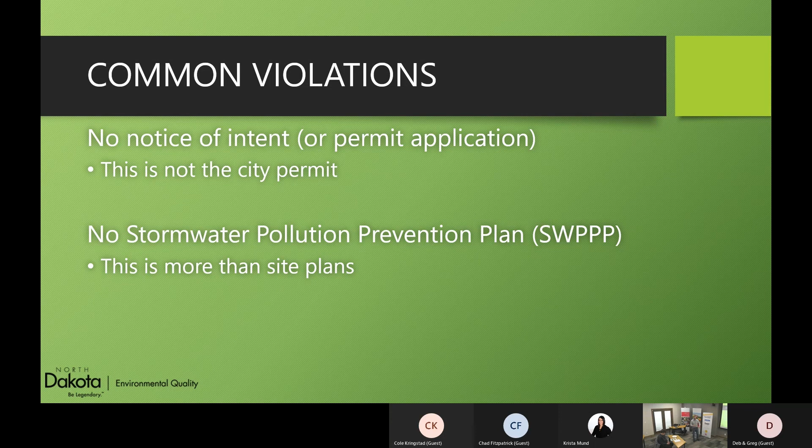This is more than just the site plans. As I had talked about, there's the narrative part that goes into it. It's more than just showing where your erosion sediment controls go. It's basically how are you going to do other pollution prevention on your project.

The other thing that we see is just no inspection and maintenance records. So again, if there is no record of your inspection or of your maintenance, that's a violation. You can keep the records electronically, or you can have a paper record. But that is required.

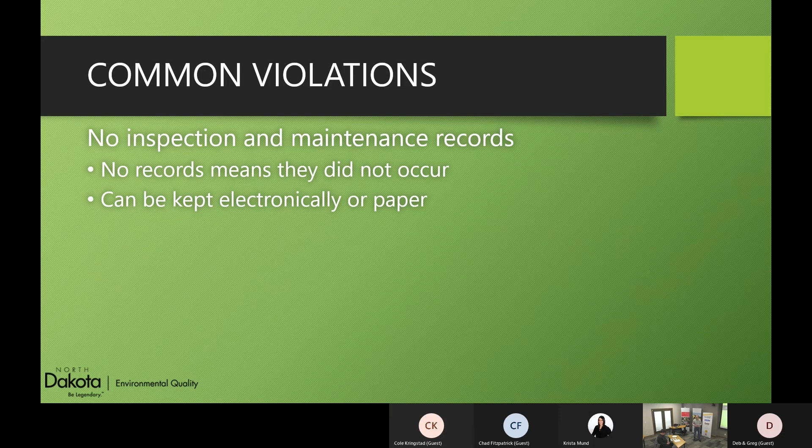The last one is basically related to erosion and sediment control. That's what we're going to see a lot of too - there isn't any erosion control, there isn't any sediment control, there isn't any stabilization, there isn't any maintenance that's occurring. Vehicles are tracking mud on the street. So if you lump it all together into a common violation, that is basically no best management practices.

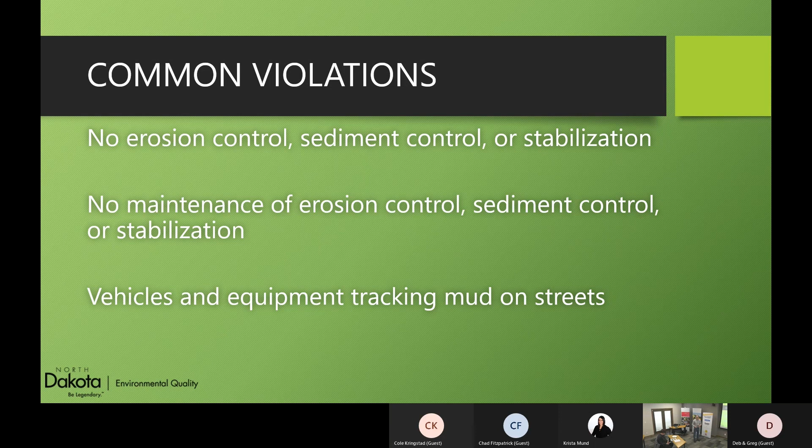So some additional takeaways. Really, it's a lot of how do you manage your sites? How do you go about doing your work? What is the pollution prevention that you're doing on your projects? Then that's basically just writing it down into your SWPPP.

If there's something where you're taking a tool that's already out there or planned and incorporating it into your project, that's fine. Again, the big thing is that this is basically a way to communicate - not only to the DEQ, not only the EPA or the city or anyone, but also to people coming onto your site. This is how we do pollution prevention on our project. This is why we have these things in place over here and over here.

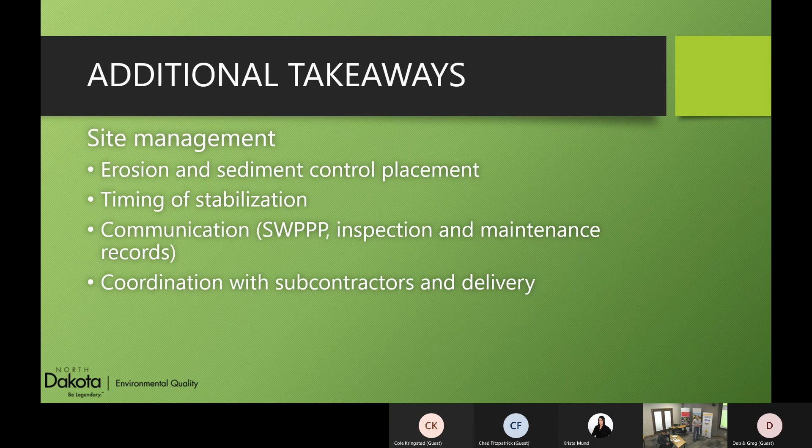And coordination with subcontractors and delivery - it's always an ongoing thing, but it is just something you've got to keep pounding away at. This is what we want to do for pollution prevention on our project, and this is what we want you to do for that. Ultimately, if you're the one who's holding the permit and someone is dragging mud off the street - say it's a subcontractor or delivery - you're still going to be responsible for it.

Seasonal changes - there's always changes in the season. I talked a lot about it as far as snow cover, winter stabilization, things like that. Other things that are out there - and I don't know how much you experienced here, but we had a lot of issues with the drought and trying to establish stabilization and different requirements there.

How when you start getting into ending a project, or getting to a project that's going to end in say June, July, August - what is that time frame? Are you going to be able to get grass to grow in certain aspects or certain areas, or do you have to look at another type of activity that you need to do?

We always talk about it too for larger projects, road projects, where say this time of year people are starting to move equipment to get on projects. Maybe they're going to start moving some dirt. Well, what happens when there's road restrictions and nothing can move? You can't do anything on that project. You've got to plan for those type of things.

As far as the permit, we're looking for compliance, not perfection on a site. This is basically a permit to minimize the discharge of pollution off your site, not to say you're not going to have anything come off your site at all. We only protect up to a certain size rain event. If you get anything bigger than that, it's expected that you're going to have pollution coming off the site.